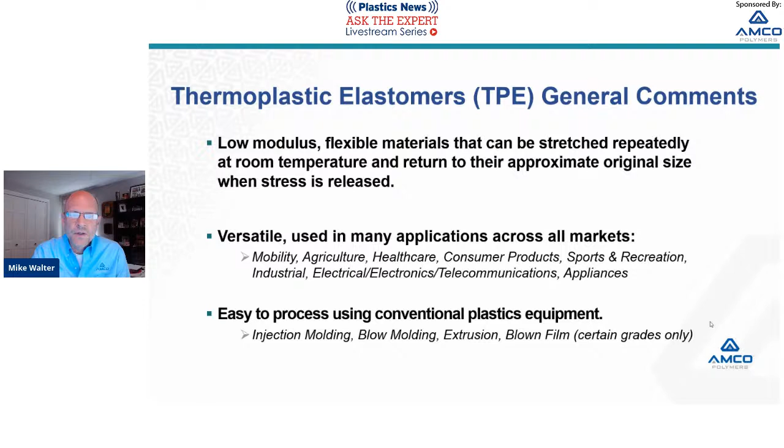First, we'll go through a few common traits of all TPEs so that we don't have to keep repeating these when we take a deeper dive into the unique properties of the different specific types of TPEs. So first of all, TPEs are recyclable. That means that you can gather your scrap from your production runs and regrind that scrap and reintroduce it into your process. All TPEs are semi-crystalline as opposed to amorphous.

Appearance options offered by TPEs are across the board. We have gloss, matte, clear, translucent, opaque, and all TPEs are easily colorable because they're semi-crystalline in nature. TPEs offer a lot of part design freedom, just meaning there's minimal limitations as to what you can and cannot design with TPEs. Some people think because of the softness, you're limited to what you can do. TPEs are pretty versatile from the design standpoint.

TPEs make exceptional overmolding materials. They bond extremely well to a variety of substrates, including all the various ETPs and certain commodity resins. They make excellent soft touch type materials.

As far as enhancements go, we can add whatever additives and stabilizers you would typically add to a rigid thermoplastic material. Your typical additives would be UV stabilizers, heat stabilizers, flame retardant additives, opacifiers, lubricants, glass fibers, carbon fibers. Those are all compatible with TPE materials.

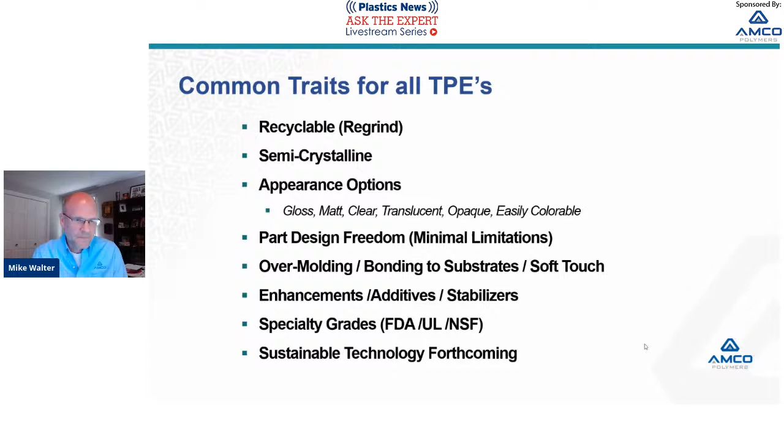Okay, so let's talk about TPE selection attributes. When you set out to choose a material for an application, you definitely want to take into consideration the traditional attributes that you would use for selecting a rigid thermoplastic. That would be your property requirements, chemical exposures, the temperature range in which the part's going to be used, your environmental exposures, regulatory requirements, and also part configuration, process method, and cost.

But in addition to that, we also like to take into consideration a few unique properties or attributes relative to TPEs specifically. So first and foremost, hardness, which is the resistance to indenting, is an important feature. In the TPE industry, we typically talk about TPEs in terms of hardness, but you really have to take into consideration hardness and flex modulus, which is the resistance to bending.

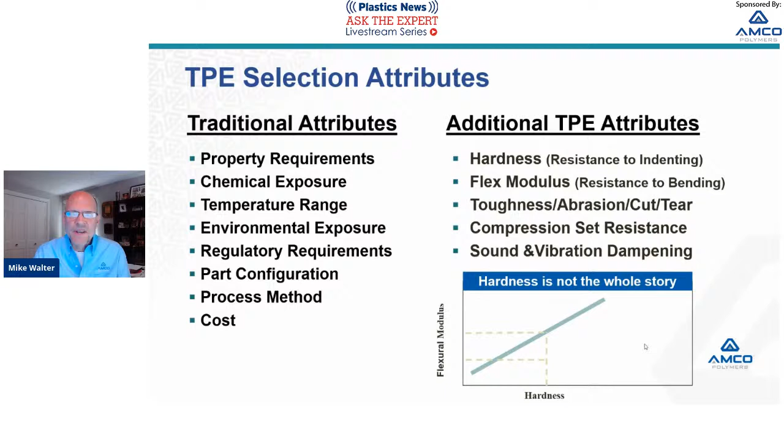We also want to look at toughness. What kind of toughness requirements do you need? Abrasion resistance, cut and tear, and also compression set and sound and vibration dampening are important concepts with TPEs.

So we measure hardness using a durometer instrument, and the values generated from that instrument are expressed in a Shore value. The two most common Shore scales used for plastics are Shore A and Shore D. Shore 00 is also used for very soft materials.

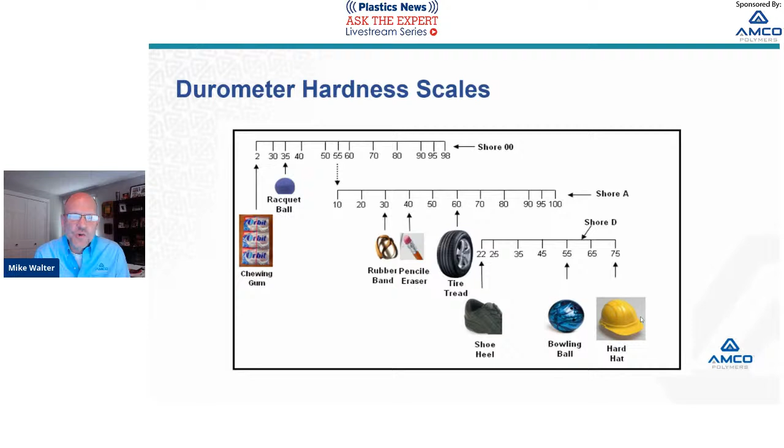Just to show you this for a frame of reference: a typical rubber band has a hardness measurement of approximately 30 Shore A. A tire tread has an approximate hardness measurement of 60 Shore A. Moving up to the more semi-rigid hardnesses on the D scale, a hard hat would be 75 Shore D, just for frame of reference.

Now, it's important to understand how TPEs are made before we get into the specific discussions. TPEs are made by combining a hard phase, or hard segment, and a soft segment. Each of those segments contributes unique characteristics to the resulting TPE compound.

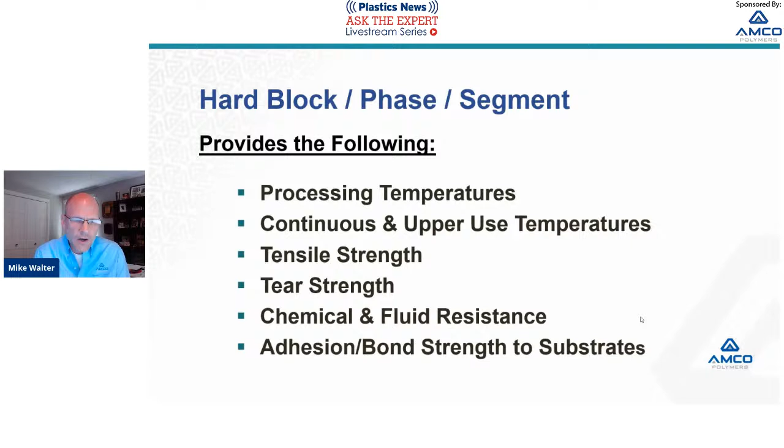On the hard segment side, that provides the processing temperatures of the end compound, the continuous and upper use temperatures, the tensile strength, tear strength, chemical and fluid resistance, and your adhesion characteristics - basically your bond strength to the various rigid substrates.

Conversely, the soft segments provide the lower service temperature limits, the hardness and flexibility characteristics, and also the compression set and tensile set characteristics, which are very important for TPEs.

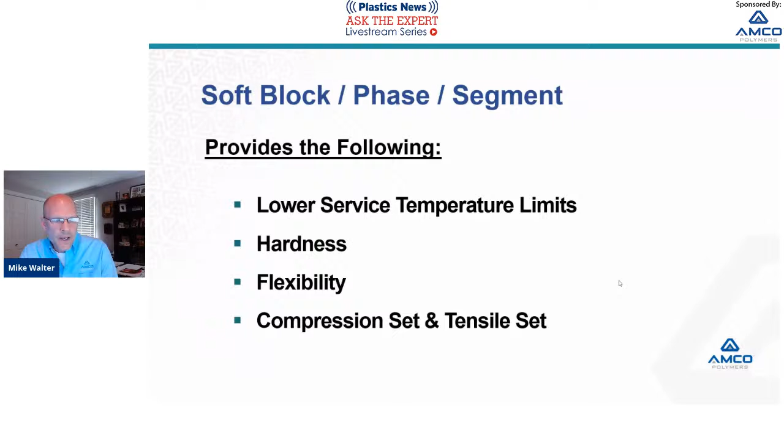Now let's take a deeper dive into the specific types of TPEs. We'll talk about 7 of them, 4 primaries and 3 secondaries.

The first is SEBS, a styrene ethylene butylene styrene. Its key attributes and applications are as follows. First and foremost, SEBS is made with a polypropylene hard segment and a SEBS synthetic rubber soft segment. General cost range for SEBS type elastomers is $1.50 to $2.50 a pound.

They have a dynamic service temperature of up to about 90 degrees C or 194 F, so they don't make really good high heat materials, but alternatively, they're really used for more room temperature, low temperature applications. They provide a really cool rubbery feel, excellent recovery, outstanding low temperature flexibility. They also bring excellent weathering and UV resistance and hydrolytic stability, or resistance to moisture. As far as chemical resistance goes, they're resistant to most mild acids, bases, alcohols, and detergents, so they lend themselves to a lot of household item type applications.

A very generous hardness range of 5 Shore A to 95 Shore A, so you can get really soft with these SEBS materials. Typical applications would be cell phone covers, medical applications, all sorts of masks and straps, and soft touch overmolds onto surgical devices.

Personal care items - that razor you see there, that green color is a 65 Shore A SEBS bonded to a rigid substrate. We have lots of different types of grips and handles for power tools, hand tools, that sort of thing. SEBS is also a very popular TPE of choice for exterior automotive applications, seals, primarily window seals.

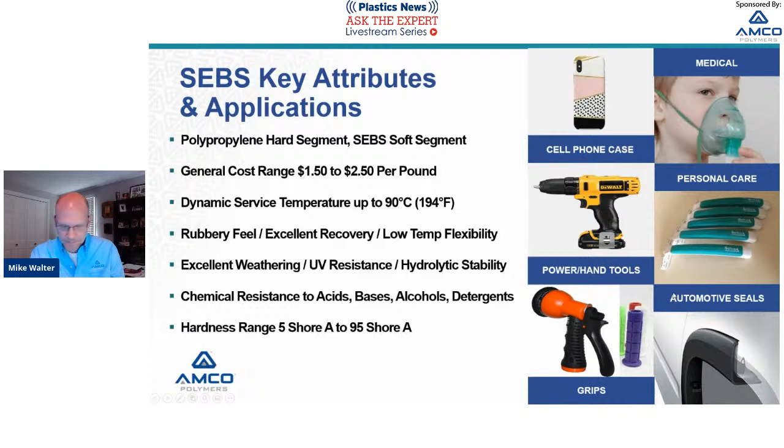Next, we're going to talk about thermoplastic vulcanizates, or TPVs. They have a polypropylene hard segment and an EPDM rubber soft segment. Not to get too far into the technology here, but basically you're combining polypropylene with an EPDM powder, and during the compounding process, the EPDM basically vulcanizes and becomes fully cross-linked, leading to some very unique properties for a thermoplastic elastomer.

General cost range is $2 to $3 a pound. Dynamic service temperature is up to about 130 degrees C or 266 F - that's the value of the cross-linked EPDM rubber, that high heat capability. In addition, you get low compression set values at elevated temperatures, good flex fatigue properties at a wide range of temperatures, and just an overall good heat aging properties.

Along with it, TPVs have pretty good chemical resistance, mainly to hot oils. TPVs stand up primarily to the non-hydrocarbon-based substances. They also have really good inherent UV resistance. And one unique feature of a TPV is they thrive on shear, so if you're injection molding TPVs, you can use really small pin gates. It just improves your degating, less gate vestige, and of course, overall better cycle times.

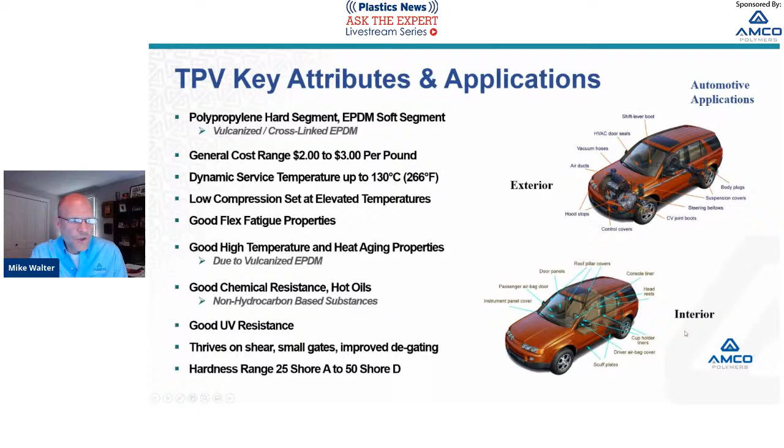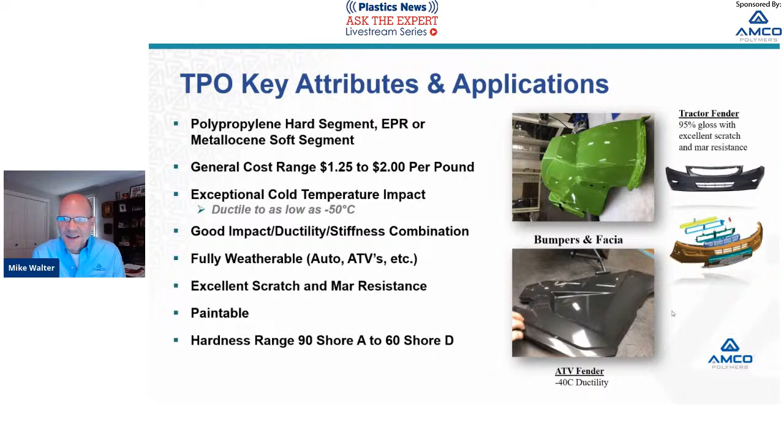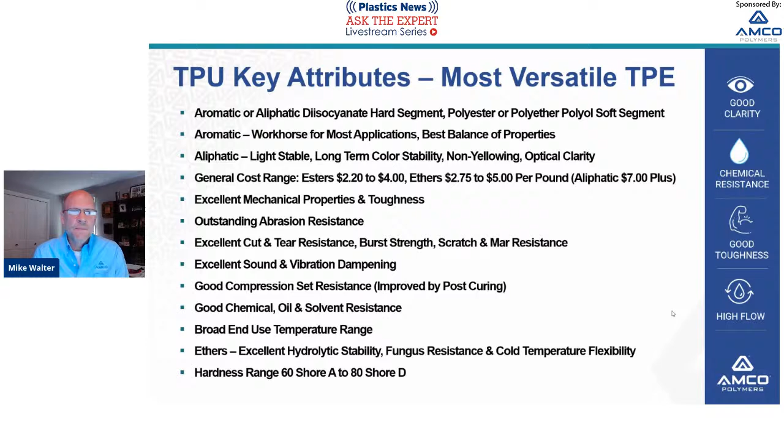One key note about outdoor applications: if you're using TPU in an outdoor application, the polyether is the way to go. They have excellent hydrolytic stability or resistance to moisture, excellent fungus resistance, and cold temperature flexibility. The hardness range for TPUs are in the 60 Shore A up to about 80 Shore D.

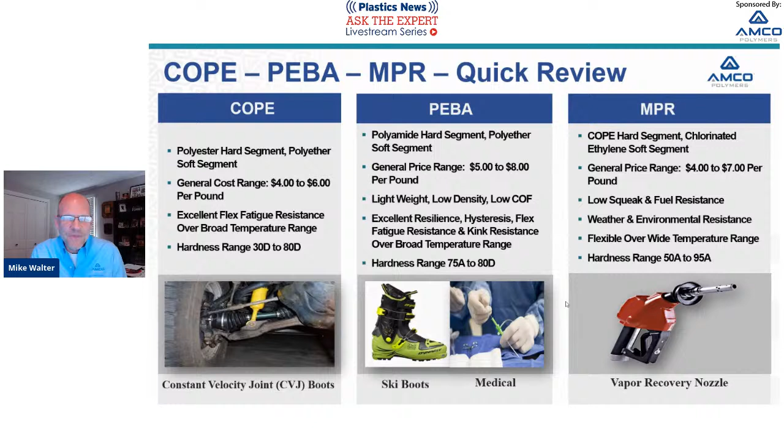Its unique features are low squeak for a thermoplastic, which is unique, and it has really good fuel resistance, which most other TPEs do not. Along with that, it has good weathering, and it's flexible over a wide range of temperature. But the most notorious MPR application is a vapor recovery nozzle, which you see every day at the gas pump. That little cup there contains the vapor in your fueling channel.

So there you have it. Thank you very much for listening, and now we can take whatever questions you might have.